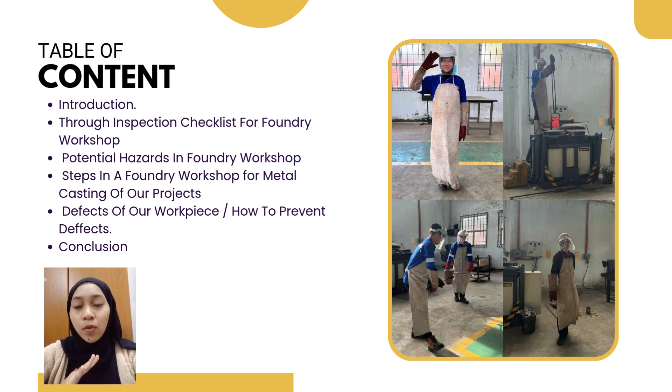and Livandro Ana Gilbert. So, here is the table of contents, which is Introduction, thorough inspection checklist for Foundry Workshop, potential hazards in Foundry Workshop, steps in a Foundry Workshop for metal casting of our projects, and the last one is defect of our workpiece and how to prevent defects.

Introduction of the Foundry Workshop. The definition of a foundry workshop is a factory where metal casting is carried out. In a foundry, metal is melted and poured into molds to create specific shapes and components used in various industries such as automotive, construction, and machinery.

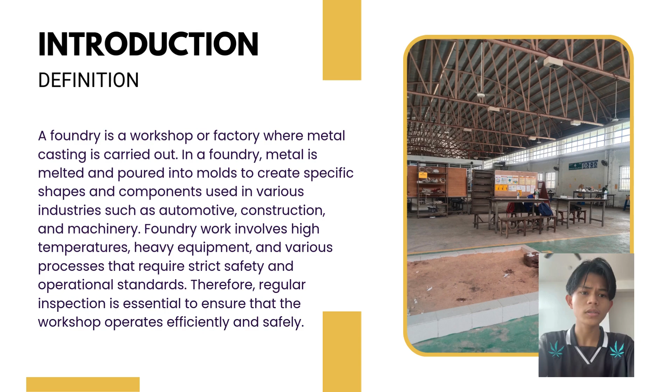Foundry works involve high temperatures, heavy equipment, and various processes that require strict safety and operational standards. Therefore, regular inspection is essential to ensure that the workshop operates efficiently and safely. Thorough inspection checklist for Foundry 1, 2, 3, and 4.

Okay, first, general housekeeping. Workshop is clean and tidy. Good lighting and ventilation. Walkways are clear. Second, safety. Fire extinguishers are available. Workers wearing PPE. And emergency exits are clear.

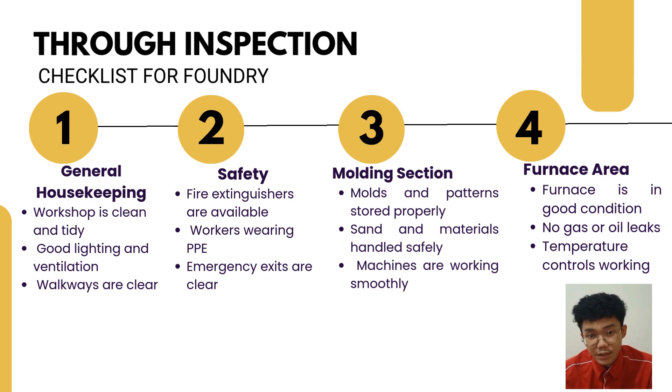Okay, for the third, molding section. Mold and pattern stored properly. Sand and material handled safely. Machines are working smoothly. And the last point is furnace area. Furnace is in good condition. No gas or oil leak. And temperature control is working.

Okay, potential hazards in foundry workshop. First, heat and burns. Workers in foundry workshop are exposed to the risk of heat and burns from contact with molten metal, hot surfaces, and sparks during pouring. Second, dust and fumes.

Silica dust from sand molds and fumes from melting metals like zinc and aluminum can cause serious respiratory diseases, especially in poorly ventilated areas. The third, physical injuries. There is a high risk of physical injuries due to falling objects, slips and trips, and being caught in moving machinery.

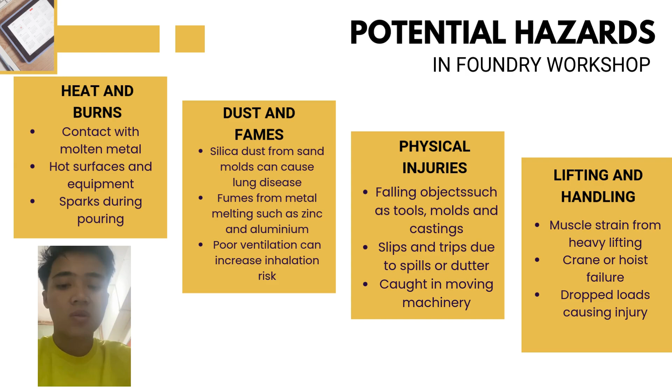In a foundry workshop, a melted aluminum machine, typically a furnace, is used to heat the aluminum to a liquid state for casting or shaping. These furnaces come in various types and sizes, including electrical induction furnace, combustion based furnace, and tilt type furnace.

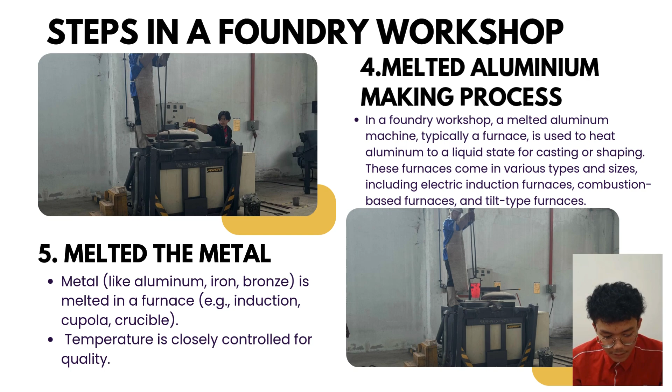5. Melting the metal. Metal like aluminum, iron, and bronze is melted in a furnace, for example, induction, cupola or crucible. And second, temperature is closely controlled for quality. Step 6 is pouring. The molten metal is carefully poured into the mold cavity, and safety procedures are rigorous and followed strictly due to the high temperatures.

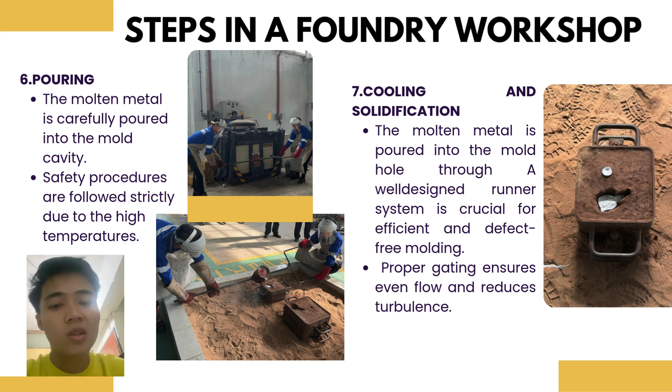Step 7 is cooling and solidification. The molten metal is poured into the mold hole; a well-designed runner system is crucial for efficient and defect-free molding. Other than that, proper gating ensures even flow and reduces turbulence.

The eighth step is shakeout. Once solidified, the mold is broken open to remove the casting, sand from the mold is shaken off and often recycled. The ninth step is cutting and cleaning. The casting is cleaned to remove sand, scale and excess metal.

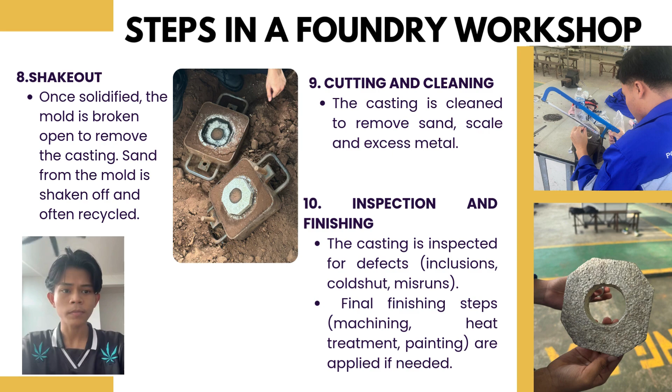The 10th step is inspection and finishing. The casting is inspected for defects, inclusions, cold shuts, and misruns. And then the final finishing step is machining, heat treatment, and painting, applied if needed. Next, we move to the next part, which is defect of our workpiece in Foundry.

Inclusions. So, the first one, we got inclusions defect. Causes of inclusions defect are improper cleaning of the mold cavity, presence of slag or dross in molten metal, inadequate fluxing or filtration, poor gating system design that allowed turbulence, and the last one is use of contaminated or recycled metal. How to prevent inclusions?

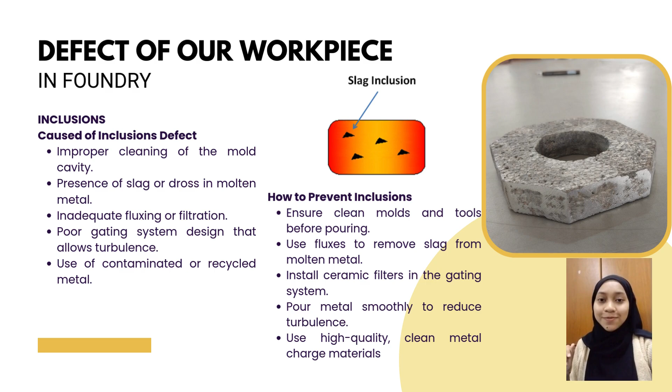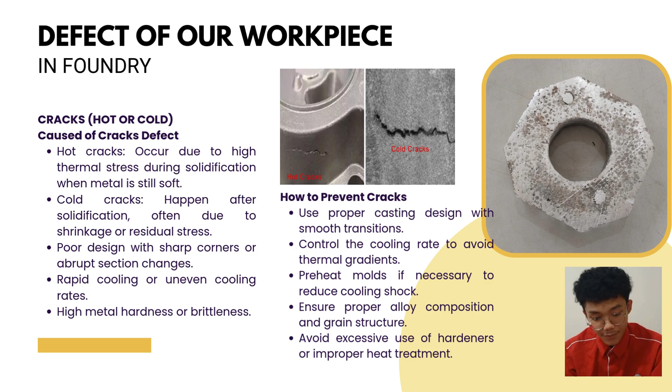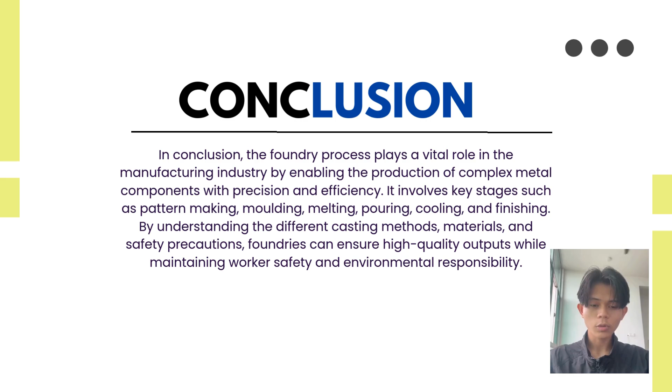In conclusion, the foundry process plays a vital role in the manufacturing industries by enabling the production of complex metal components with precision and efficiency. It involves key stages such as pattern making, molding, melting, pouring, cooling, and finishing. By understanding the different casting methods, materials, and safety precautions, foundries can ensure high-quality outputs while maintaining worker safety and environmental responsibility.